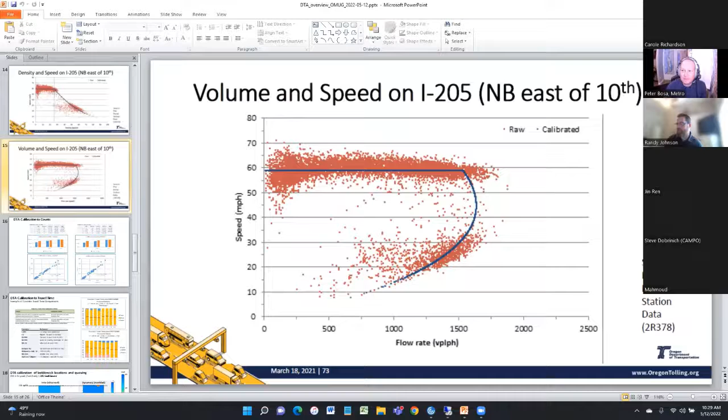So David Hensle with RSG is going to be presenting on an example DTA application from Michigan using DTA for Ford Motors Corktown demand responsive transit simulation. And David is in his third year with RSG as a transportation modeling analyst. His primary focus is on travel demand forecasting and has contributed to the development of many travel demand models, including the Detroit, San Francisco Bay Area, and San Diego. He's also an active software developer on the ActivitySim activity-based modeling platform, and he comes to us with a background in physics. So David, I'll go ahead and let you take it from here.

Thanks, Randy. So you guys should all be able to see my screen. I guess holler at me if you don't see it.

But we're talking today about our work with Ford Motors on a demand responsive transit simulation in Wayne County, Michigan, which is the county that surrounds Detroit. So kind of where we're going here, we used MATSim to simulate traffic in the greater Detroit area. So I'll walk us through some background, a little bit on the MATSim tool in general, what we did to develop the network and put some demand on there, and then the modeling of this demand responsive transit, which is essentially like an Uber pool service, but with kind of an eye towards automated vehicles.

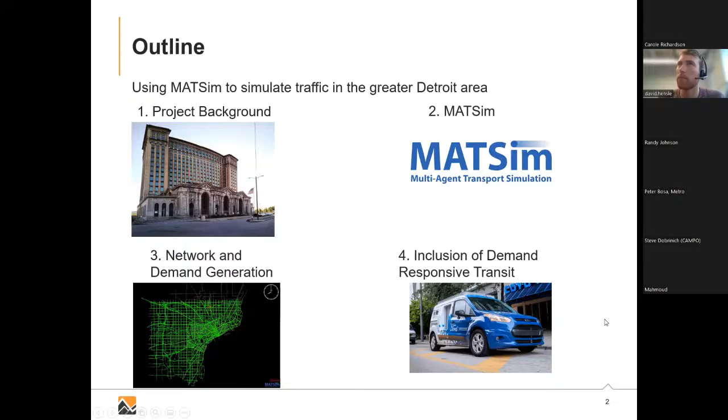So project background, it was a collaborative effort between RSG and ETH Zurich. ETH Zurich is one of the primary developers and users of MATSim, so we leaned on them a lot for MATSim specific knowledge, and RSG was primarily responsible for a lot of the network and demand development.

So the project essentially started with this new, or I guess old building in the Corktown region of Detroit, just outside of downtown Detroit. Ford Motors bought this historic building, the Michigan Central Station, a couple of years ago, and the idea was that they're going to turn this decrepit old historic train station that used to be kind of the jewel of the community in this area, but that has since been run down, into a brand new office focusing on autonomous vehicles and all of Ford's administrative offices.

So that's kind of the idea here, is that they wanted to understand what the impact of adding 5,000 workers or something like that to this area and how it would impact the traffic around the region. And not only that, but explore different and new mobility options like this Uber pooling type service, but with an eye, like I said, towards more autonomous vehicles and ride sharing options.

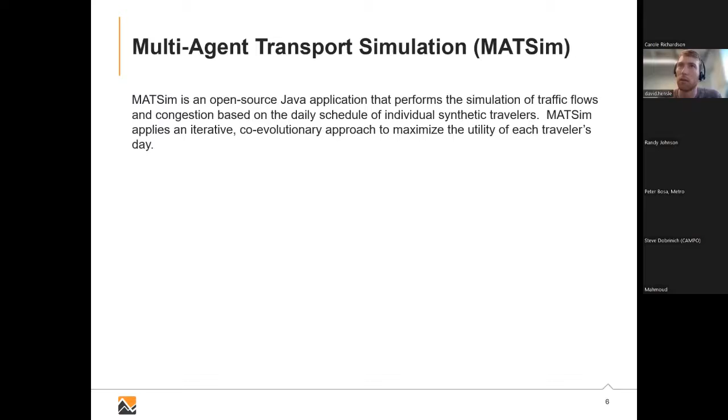So that's kind of given by this MATSim loop here, where you start with some scenario data. So each individual person's plans, the individual network links and architecture of the network. And then you route each one of the agents on the network. There's a lot of parallelization and computational optimization that happens here to get everybody to go where they're going. And then there's some scoring function that determines how quickly or how well an agent goes from their origin to their destination.

Generally, MATSim has the ability to change people's daily patterns to try to reach convergence with a co-evolutionary approach. We didn't really want to allow people to change where they were going or when they were going there. We did allow people to change the route, how they got there, and the mode, what they used to get there. So there's a scoring function, which we limited in this instance, and then there's this replanning loop that comes back, and you run this until you reach some convergence. And then, of course, we want to do output analysis like traffic volumes and mode choice distribution, things like that.

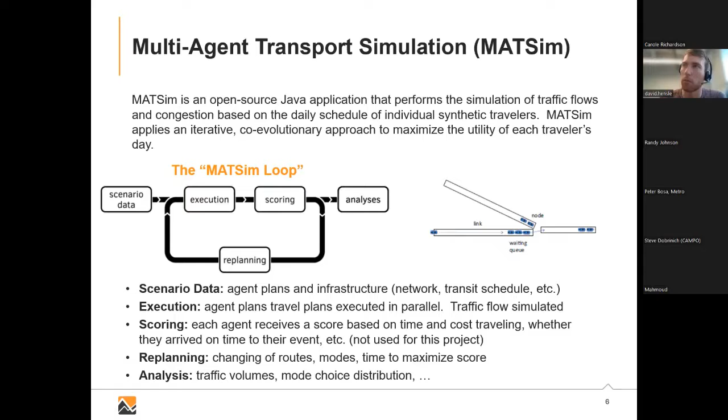So this is kind of a workflow diagram, I guess, of what goes into this whole thing. And we'll talk about each one of these pieces as we go through the rest of the presentation. But you'll have a network. We got ours from OpenStreetMap. We also included some transit data in here.

We used the region's trip-based model as our demand, and we assigned the trips to the network, and then we fed all this into MATSim. When I say assign trips to network here, I mean starting and ending links on the network. And then we allowed them to be simulated by MATSim. There's a mode choice model where we added this DRT option, and then we'll have some output analysis, and then this process gets iterated as a function of how we're doing.

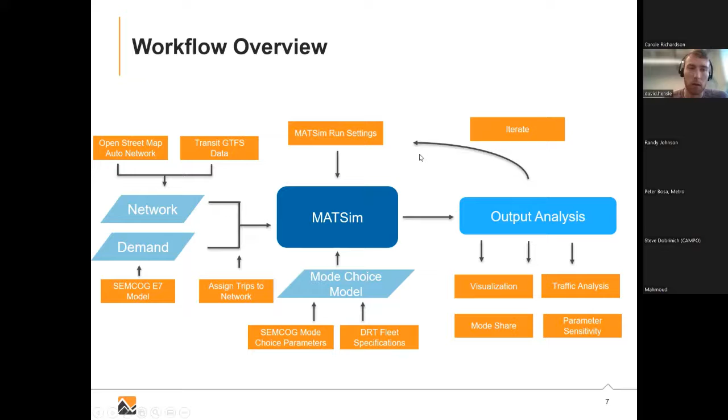So moving on to the demand and network creation. The demand, as I just mentioned, came from the region's trip-based travel demand model, from the Southeast Michigan Council of Governments, which is the MPO for this big 7-county region. There's almost 3,000 TAZs in this area, corresponding to 21 million person trips.

I think it's important to note here that we use the SEMCOG travel demand model because it's already a calibrated and validated model. We didn't want to try to create a travel demand model from scratch for this whole project. So the idea is to use something that's already been created, used and validated. And the idea is also that it could be more easily replicable to other regions that have similar trip-based models.

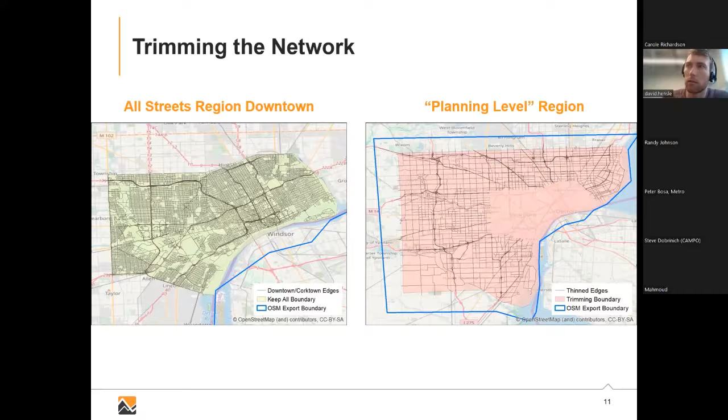So we wanted to trim the network to help our computational time. We did want the detail downtown around the Corktown campus, which is right here. This is downtown Detroit. The main area is here, but of course you'll have people moving all over the really dense metro region. So we took the SEMCOG planning level network and trimmed out all the auxiliary streets outside of the downtown region to avoid unnecessary computation time.

There's a lot in here that can be really tricky when we're talking about network cleaning. So here's an interesting case where we trimmed the network. This is a smaller road, but these were more main arterials. And this just happened to be on the line that was cut off. But this actually created a routing problem. Even though the roads are correct here, because we trimmed this out, there's now a routing problem because this is a one-way segment and this is a one-way segment.

So if you have any agents that try to start on either one of these links when you distribute your agents onto the network, there's no way for them to route out of this segment. So it's things like this that can be very tricky when you're dealing with a large scale region with a lot of network links.

We also included some transit. So there's a Java application called pt2matsim, which takes the GTFS data for this region and integrates it with the MATSim network. So you can kind of see the coverage. Detroit doesn't have a whole lot of transit in it. There's one QLINE here, which is a streetcar that kind of runs on one street in downtown. There's a central business district circulator here called the Detroit People Mover.

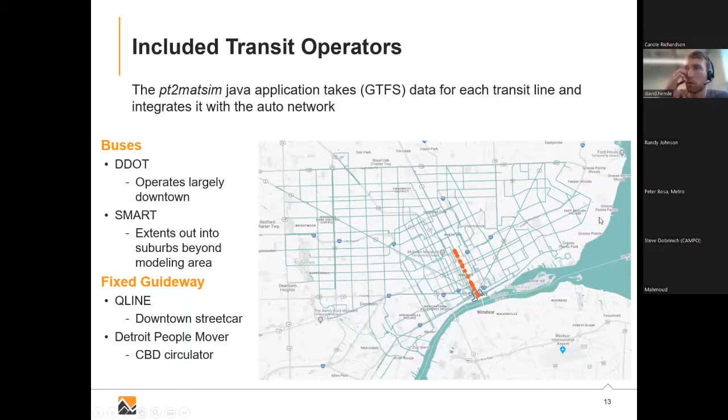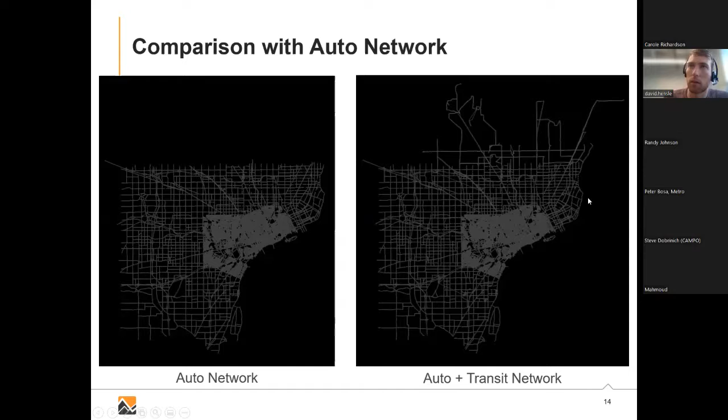And then there's this bus system, and then there's a few more bus routes that kind of extend out into the suburb region. So you can see this is what it kind of looks like when you load it up in MATSim. We have a really dense network in the downtown region, and then a planning level network around it. And then when we include transit, it'll include extra links in here. And so you see that, as I said, it really extends out in the suburbs, and that's what all these extra links are up here, is the bus network that extended beyond our model region.

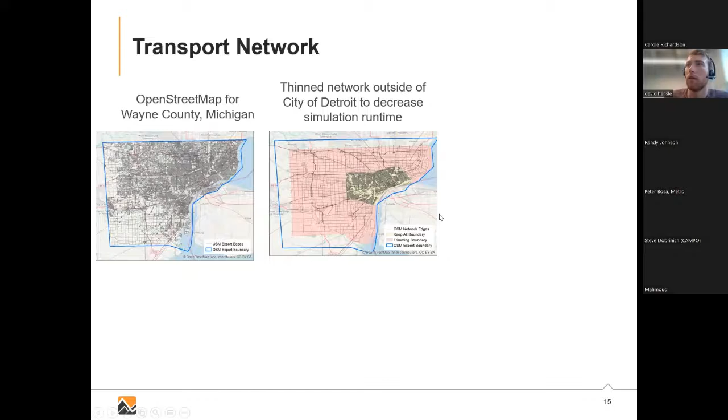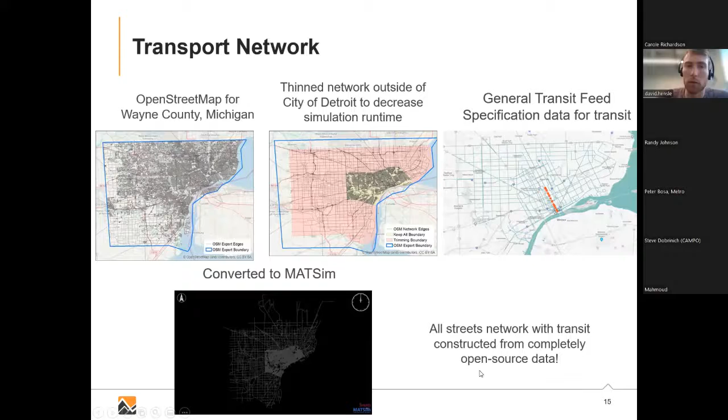So to kind of summarize here, we started with OpenStreetMap for Wayne County. We trimmed it. We added some transit to the network, and then converted it into a MATSim format. And we were able to do all of this with open source data and open source tools, which I think is pretty cool.

So now we have a network and the demand on here, we can actually kind of load it up. And so I'm playing this little video showing, if I zoom in here, the individual MATSim agents that are going around on the network. And you can kind of see, if you look in this region, there's a link that gets congested. And so that's like the link level queuing that I was discussing at the very start that MATSim kind of works on.

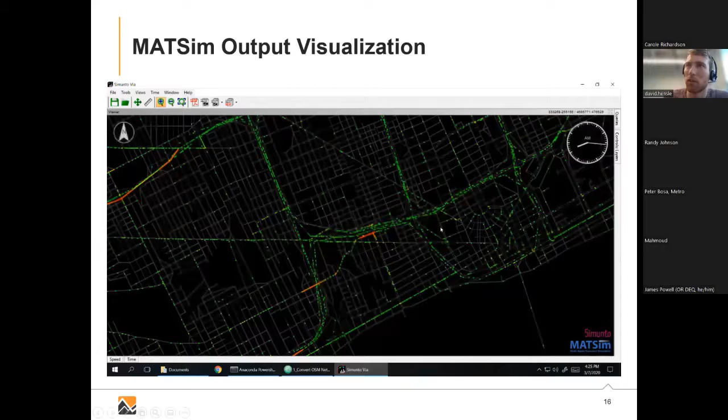So pretty mesmerizing to kind of watch this for a little while. You can kind of see that there's portions around here in the network in this video that are more congested than others. And so what you can do with this, if I move on and take snapshots throughout the day, is you can see where the problem spots are on your network.

So what this really leads us to is there's generally regions in your development cycle where you have network problems. So for example, there's this interchange right here. There's 8 Mile Road and I-75. And there's this little link, like this one right here is a link in the network. And in reality, it's 2 lanes, kind of this split lane deal, but it was coded as 1 lane from OpenStreetMap.

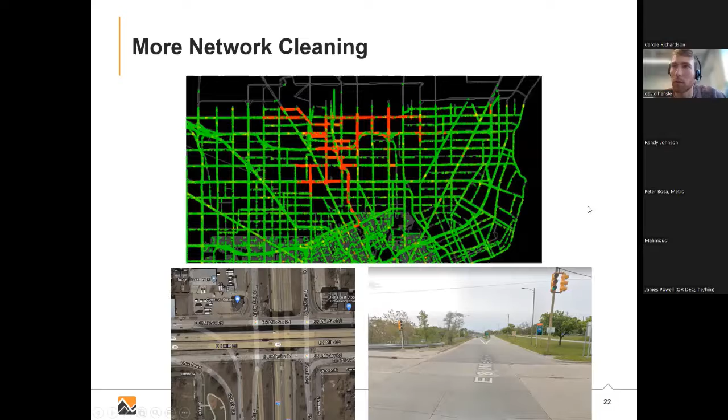So here's an example where people are coming off the highway or trying to get on the highway, and this one small tiny little lane backs up, which causes a backup onto the highway, and it just spreads throughout the day. So very small problems in your network can really cause headaches when you're doing scales like this.

So after we sorted out a bunch of those issues, we were able to look more at the demand responsive transit portion. And the way that we incorporated this was by using a mode choice model. So we have our usual car mode, some non-motorized modes, and public transit. And then we added an additional demand responsive transit mode here. The parameters for this mode choice model came from the SEMCOG trip-based model.

They include things like in-vehicle time, out-of-vehicle time if you're doing things like walk to transit, or walking or biking. We also have some travel costs, auto operating costs or toll costs. We have utility terms based on the household income and the availability of a vehicle for the household from which that agent comes.

And so what you essentially get is for each person, you sum up all the utility terms, and then you create a probability from that. And then you randomly draw from that probability distribution for each person to be able to have some people that select demand responsive transit. And also some elasticities based on travel cost or whatever parameters that you have in your model. As you change those, that'll change the probability that people will select your given mode.

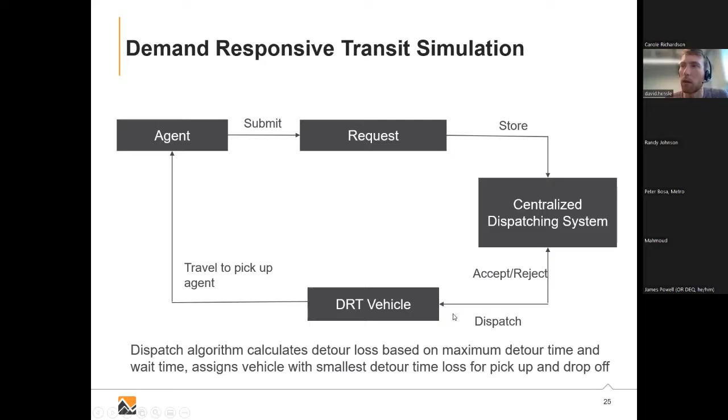So we tried a bunch of different scenarios. We tried multiple different fleets, multiple different vehicle occupancies, the size of the DRT vehicle, and 2 different fares, $2 and $4 fare, just a flat fare. We didn't do any distance scaling here.

And we fixed some things here, we said that the customer was only allowed to wait 15 minutes. If they had to wait for more than 15 minutes, then their request was rejected. If there was more than a 15-minute detour time for the vehicle, then that vehicle is not allowed to pick them up or drop them off. And then there was an additional almost 2-minute wait time at each one of the stops that was included.

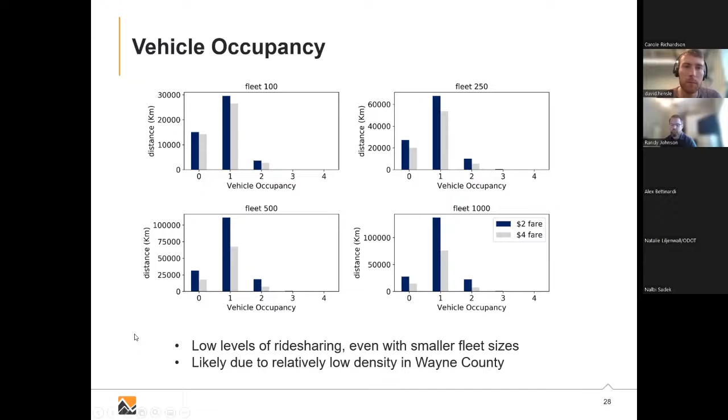Well, like if it's free, that's clear. I don't know. Yeah, so that was kind of the point that I was making about it'd be cool to integrate this with the regional travel demand model. If this becomes a mode and it's more available and people are willing to take it, does that mean that less people are going to own cars? That's not something that was explored as part of this project, if that answers your question. Sure, that makes sense. So the ownership is somewhat static, but was the amount of shifting to this new mode a function of, was there a variable tested in how much the ride cost the chooser?

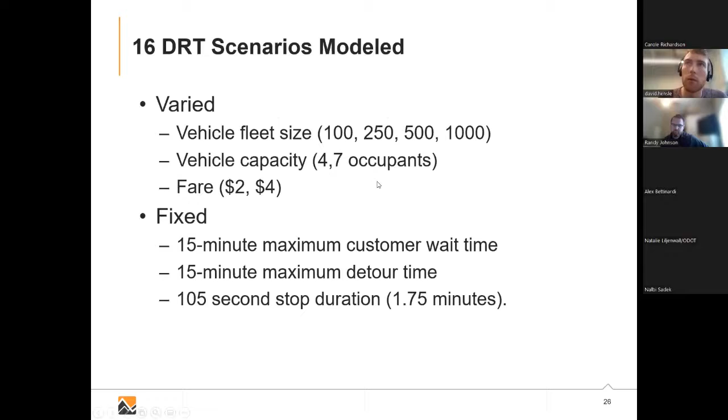Yeah, right. So that's this fare cost here. And so if you look at the mode choice model, the fare would come into this travel cost if you're in the demand responsive transit portion, right? Or if you're in public transit, it'd be the fare of the transit vehicle. Or if you're in a car, we have some auto operating cost parameter that comes in there as well. Got it. Thanks. I just missed the slide. Thanks so much. Okay, and then final question here before we jump to the next presentation from Peter Bosa.

Did you validate the MATSim all-day network results with observable data? Yeah, so we took the counts from the SEMCOG region, and we linked them onto the network, and we did some count analysis as a function of time of day. That was kind of the main validation plots that we used, and we also wanted to make sure that the mode choice model was validated as well based on the mode shares in the SEMCOG region, and just in the model.

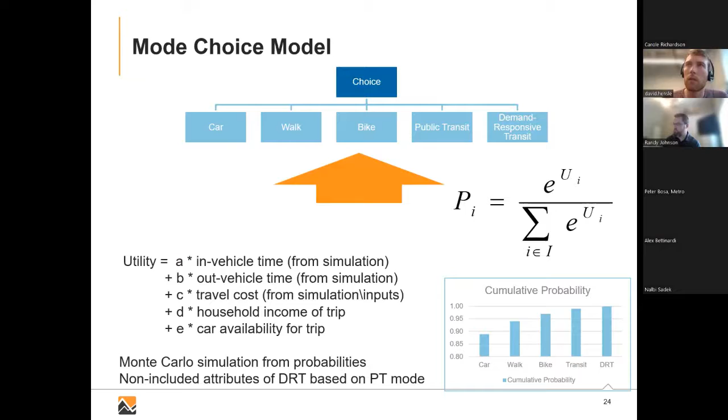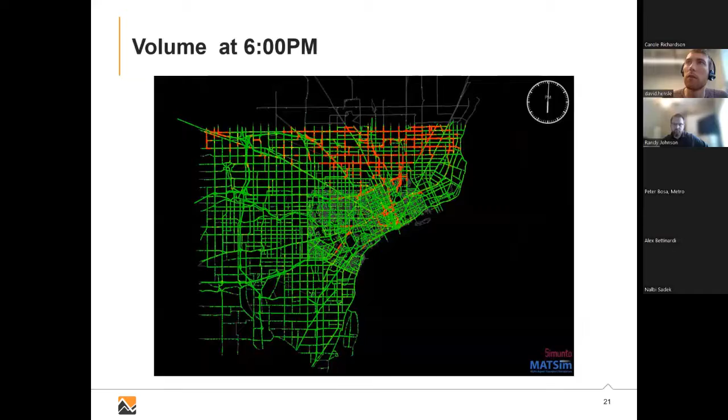Just a quick follow-up, David. Thank you for answering that. Did you have to do some sort of demand adjustment for MatSim, or did you find that putting in the raw demand from the SEMCOG model, you were able to validate pretty well against the counts? Yeah, that's a great question. I think matching the counts was more about the level of congestion, which had more to do with the network cleaning. In terms of the demand, this was tricky because the trip-based model has very defined time of day periods. And we wanted to be completely consistent with the trip-based model.

There's these discontinuities that happen at these time of day periods where, like from the midday period to the PM peak period, you have this spike in demand. And even if we distribute people in a way that makes sense temporally on the network, you still have this discontinuity because a whole lot more people show up on the network at 4 p.m. So that was a challenge for us, and it wasn't really resolved. So if you were to look at individual half-hour time periods on the network, the validation might not look as great as if you were to look at the whole day.

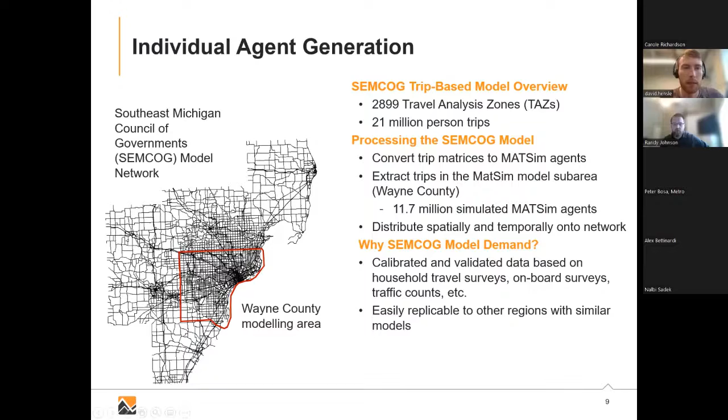Okay, perfect. Well, thanks again. We're going to go ahead and jump on to the next presentation, which myself and my colleague Caleb Huskies will be taking the reins here.